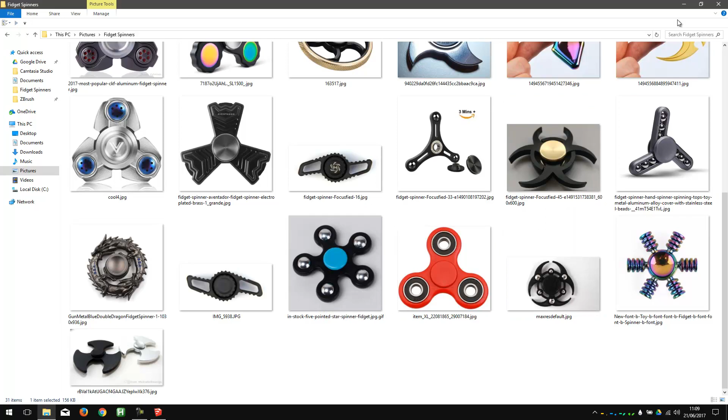So I've actually made the overall shape before just to try it out and see if we could do it. I'll keep that open so we can refer to it, and hopefully we can find a relatively easy way to make that shape. So we'll start out with the central bearing.

11 millimeters, enter, but I don't need to type the millimeters, remember. And I need to make something that goes from here up to 40 millimeters high, so we make sure that we don't make it larger than 40 millimeters. So I start and then I type in 40, enter, and then press escape to finish drawing that line.

And if for some reason you can't see the line that you drew on the axis, you can go view and hide the axes. Okay, now I'm going to draw that size circle, and if I remember correctly, well, I could measure it actually, see what I did last time. It's just about 20 millimeters, so 10 for the radius.

So I want to come down 10 and then draw the circle. So let's see, what's the best way to do that? I could just do this. Type in 10, enter. Then grab that, get my move tool, touch the very top point there, and then touch the top point there.

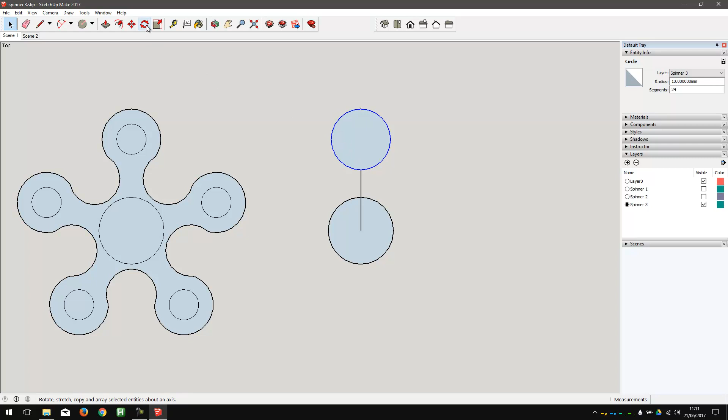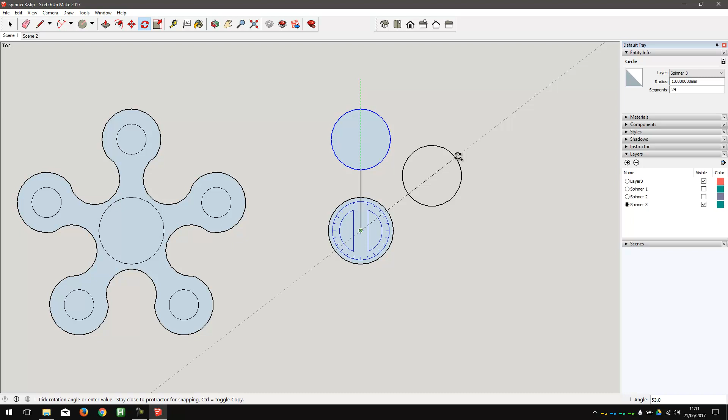I'll get my rotate tool. I'll click on the center of rotation first, make sure it's right there on that endpoint. Then I'm going to click up here. I'm going to start rotating, but press Control first, and that means it'll drag a copy. There's five going around 360 degrees, which means it's 72 degrees. So I type in 72, enter, and then I press X, 4 copies.

And that did that pretty well. Let's move this over just a little bit. And now we need to make these curves going in.

Now, one way I could do that would be to draw a semicircle. So from this point to this point, draw a little line, and then draw a semicircle. So let's try that. And to make sure that we get the correct line, right, because I might accidentally go there, or there, or there. I want to make sure it's exactly these two circles.

So what I really want to do is draw a line from the center of this circle. Alright, and here's a little tip. If you start with the pencil and go straight to the center, it's hard to find the middle. If you touch the circle on the outside, it highlights the center of the circle with a blue dot, and then I can go there and touch that.

So click once. Now I'm going to touch this circle. It highlights the center with a blue dot. Then go touch that blue dot. There we go. And now, because I drew a line from there to there, we know that that point and that point are exactly the correct points to draw this semicircle.

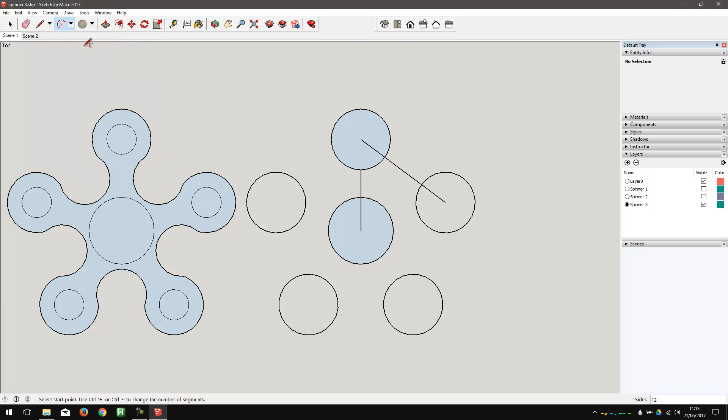And now I'll go over to, not shapes, curves. I'll do a 2-point arc. I'll zoom in a little bit so you can see this better. I'll click there. And then I'll click there. And then I'll come in until it says half circle. Half circle. Click. So that's good.

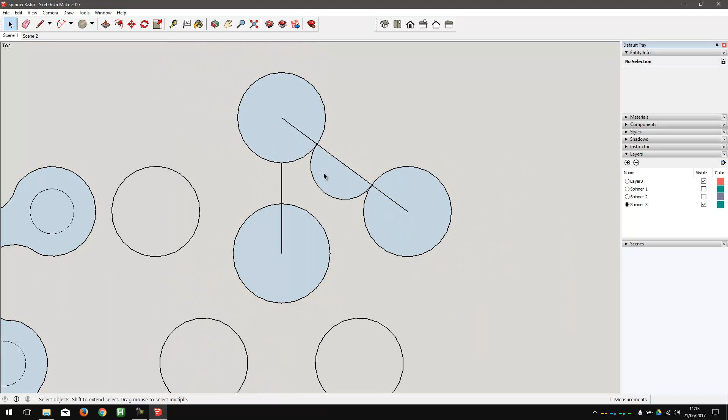At this point I can rub out that line.

And now I want to copy that half circle all the way around. So I'll highlight that half circle, get my rotate tool, click on the center there, make sure I'm on the center. It says endpoint, and I know that this line goes directly to the center of the circle.

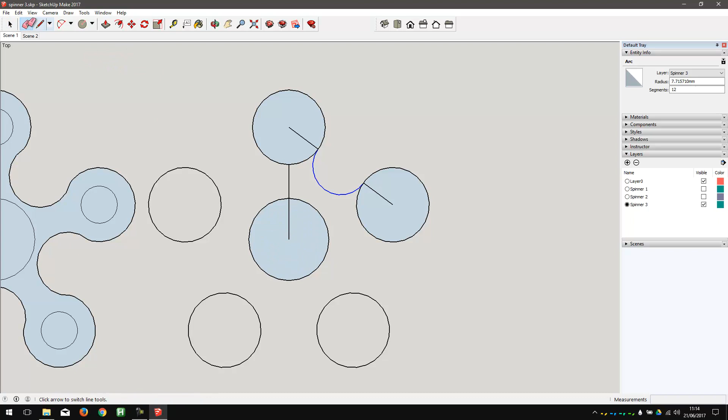Incidentally, if that line wasn't there, maybe you rubbed it out like that, I'll highlight the curve I want to copy, get my rotate tool. And it's hard to find the center, so just touch the circle. Like I said before, when you touch the circle, it highlights the center with a blue dot. Then I can go touch that blue dot, click.

Now, in all honesty, it doesn't matter where I click here. What matters is the number that I type in. But I just like to get into the habit of always pointing maybe north or 12 o'clock. So I click once, start rotating around, and that's odd. Why is it doing that? Well, it's moving that central semicircle, and that makes the objects that it's glued to change.

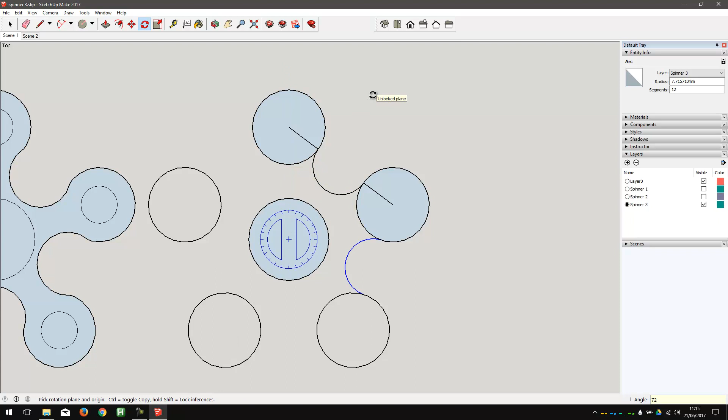So in order to prevent that from happening, I simply need to tap Control. I don't need to hold Control down, just tap it. And now it's grabbing a copy instead. 360 divided by 5 is 72, so I type in 72, enter, and then lowercase x 4, enter. And that did that, so that's good.

I think I want to make a circle for these. Instead of ball bearings, I was going to put sort of marbles in there. So let's just double check the size on those.

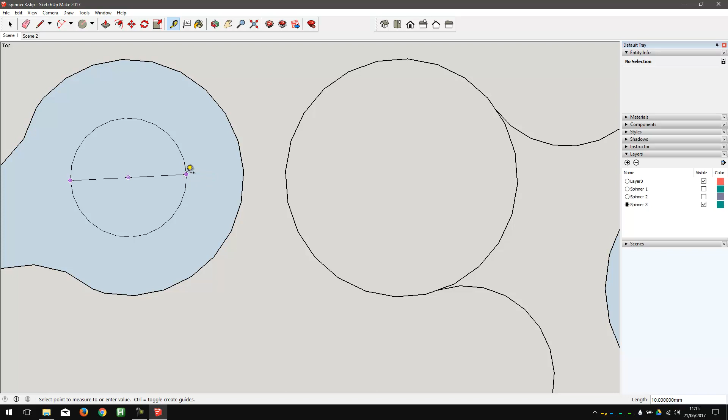If you need to, you can zoom in. Click there. Try to make sure you're going straight across. Like that would be no good. I need to make sure you're going straight across, and it says 10 millimeters. I think that's fairly standard for regular plain old glass marbles.

So I'll draw a circle starting there. Don't go at an angle, go straight up or straight to the right. And then instead of clicking the mouse button for the second point, I simply type in 5 for the radius, enter.

At this stage I can delete some of the things I don't need, like that. I can grab that disk, like that. Actually, no, I probably want to grab the outline, the circle there. Get my rotate tool.

Now I found the center beautifully, but if it didn't, touch the edge of the circle. It highlights the center of the circle blue. Then touch the center of the circle. Click. Okay, go up here, click again. Okay, tap Control on my keyboard. Type in 72 enter, x 4, enter.

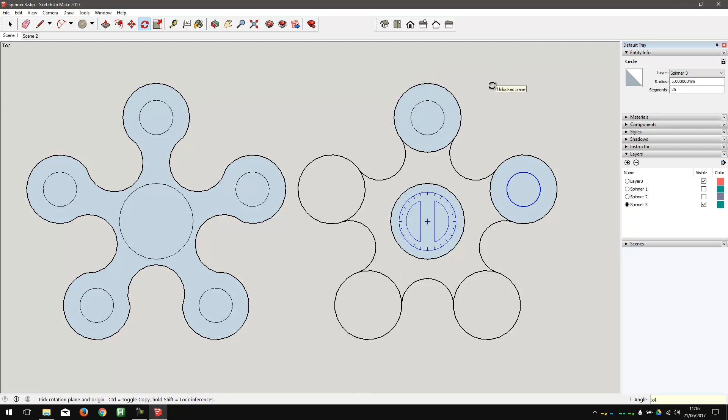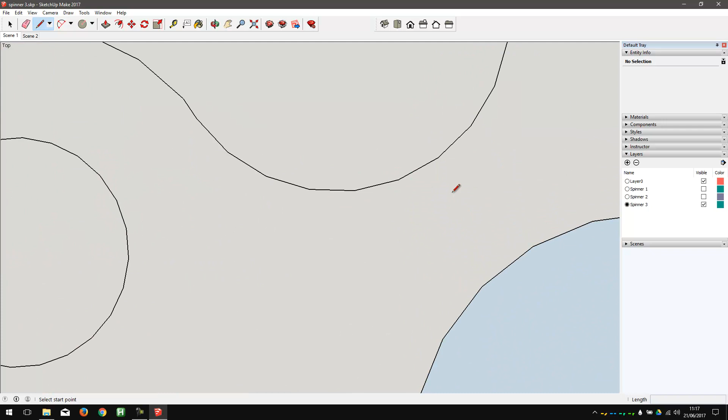And at this stage I can start rubbing out some of these curves that I don't need. And that one. And you can see that there's no fill, so let me just see if I can fix that. Sometimes I've found to fix fills I can just go to any points like that, click once, and then go to a point there and click again. And see how that fixed the fill?

And there's also another problem. If you see a line like this one, for example, that's bolder than this line, it means that for some reason that disk is not selectable, so I can't delete that disk. Well, fix it the exact same way.

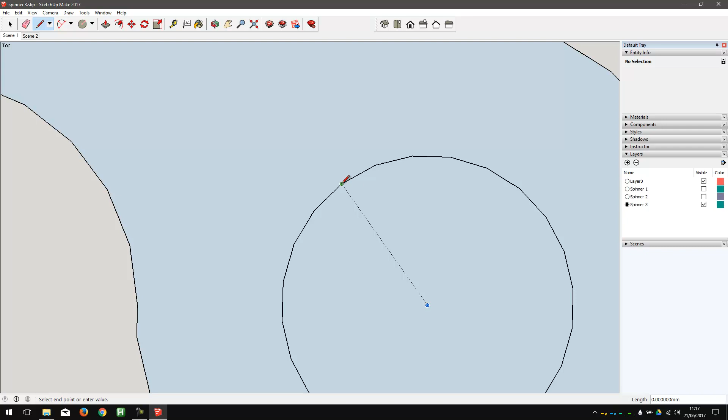Let me just show you the difference. This line is a bit thinner, and you can see I can select that disk and delete it. When I go to try to select that disk to delete it, it selects the whole thing. The way to fix that is just get your pencil tool, zoom in, you can see those segments, just click once there, click there. That fixed it, it went thin. Now you can select that and delete it.

If you try to select something and it selects more than what you thought it should, just get your pencil tool. By the way, green is endpoint, light blue is midpoint. So I want to go to the 2 endpoints like that. Delete that. I can delete that.

That's no good. Get my pencil tool. I tend to zoom in quite a bit just to make sure I'm doing things correctly.

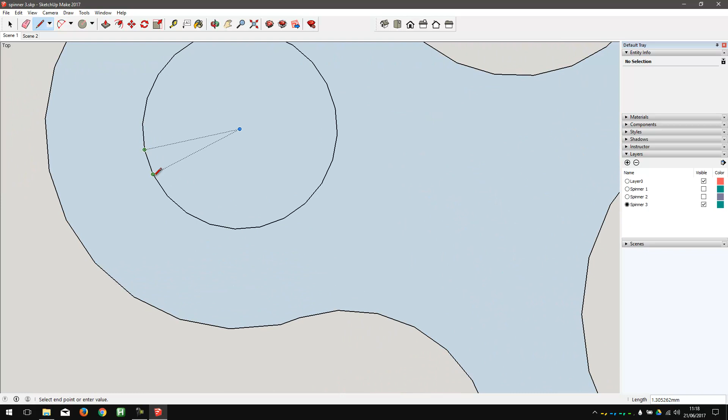Okay, almost done. And now we can go to a 3D view, grab my push-pull tool, tap the surface, push upwards, type in 7, enter. Okay, we don't need this anymore.

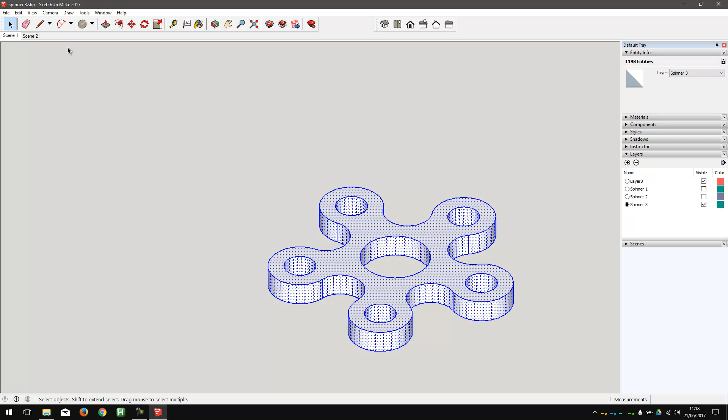Triple click this, 1, 2, 3, edit, make group, and can't remember what color I made the original, so I'll just grab a color here. Materials, let's go for colors, and we'll go for purple.

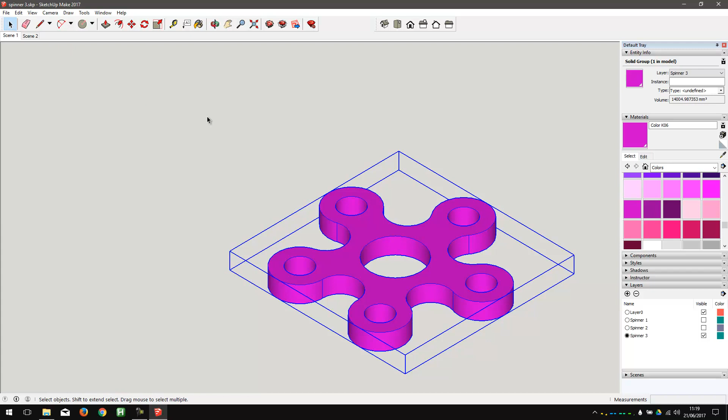And that's it. Okay, just another really quick thing. Let's close materials and look at layers.

Okay, so let's make spinner 2 visible. There it is. Let's make spinner 2 the highlighted layer and hide spinner 3.

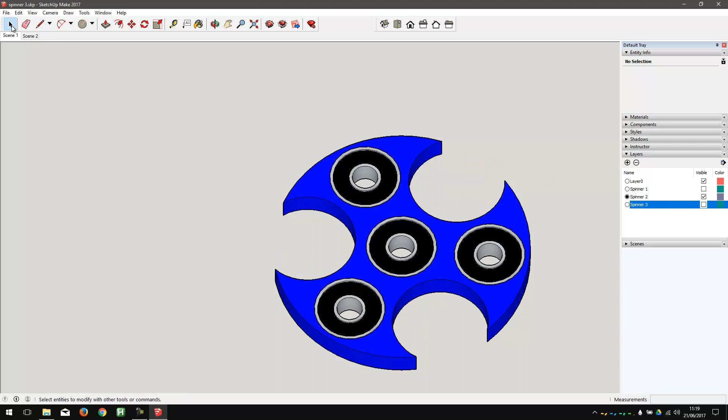Now let's copy one of those components. Well, they're all grouped up. Actually, I don't need to copy them. What I could do, because I made the original ball bearing as a component, I can make spinner 3 active again, hide spinner 2, and with spinner 3 active, I'm going to go up to the tray here that says

Components, and remember, if you don't see that tray, go up to Window, Default Tray, and turn on Components. Then I'm going to click on the little down arrow right there and say I want to see some components that are in the model.

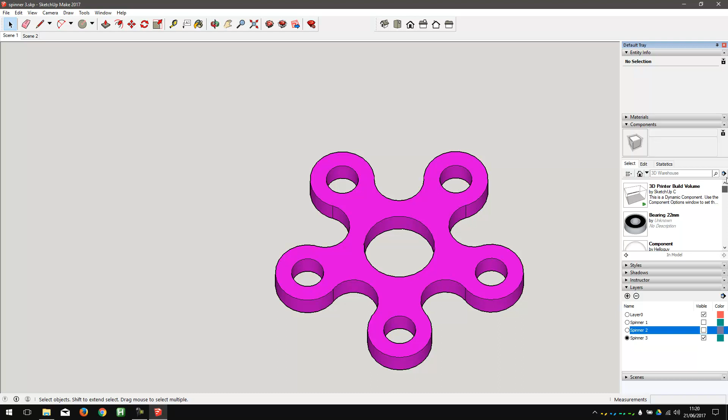And here are the components that are in the model, and the only one I need is the bearing, so I single click that, and I'm just going to drop it right there for now, and then I'm going to hide that because I don't need that anymore.

Now I'll go to a top view, and I want to center this one perfectly right there. So here's my trick: I just grab the pencil tool

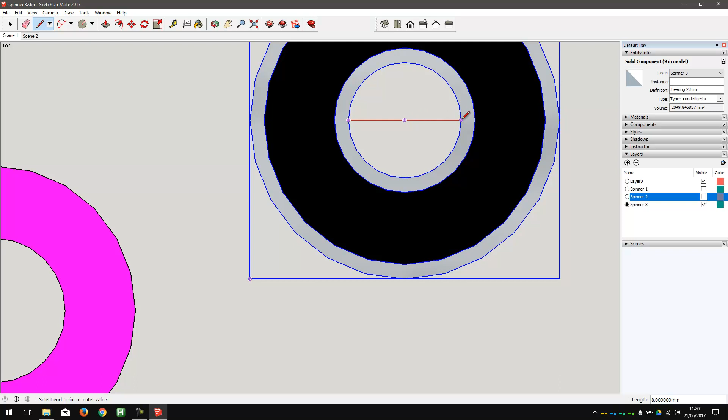And I find the midpoint. So I just touch the circle there and go to the midpoint, or more often than not I'll go straight across like so, and then I'll press escape.

And I'll do the same thing here, but maybe from top to bottom, like that. Press escape to finish the line.

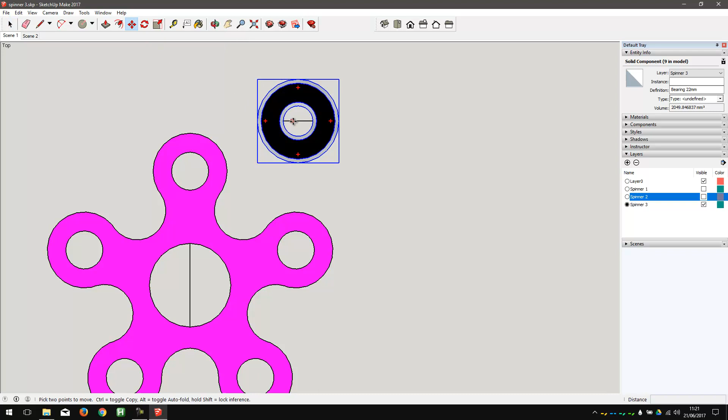And then what I'll do is I will simply touch only the bearing, like so. So select the bearing, get my move tool, like so, and then I will touch the center or midpoint of that line. Okay, and it just snaps right to the middle there.

And then I will touch the midpoint of that vertical line, and then I can actually rub the two lines out because I don't need them anymore.

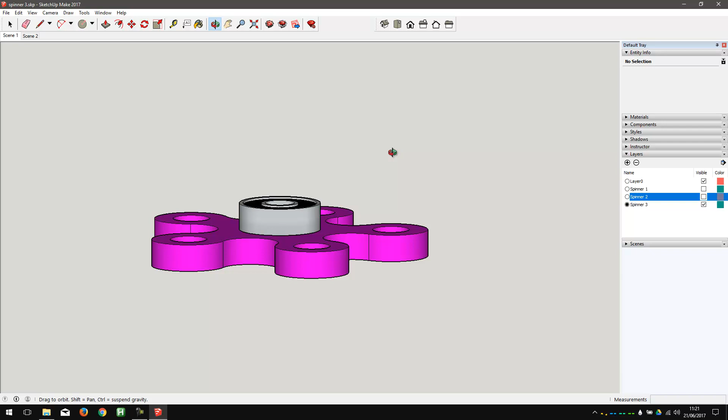Just go to a 3D view to make sure it looks good, and if for some reason this was not lined up, so for example maybe it was up resting on the surface like so, because that happens sometimes by accident, all you would need to do is go to a front view, make sure perspective isn't on, because if it is, it would look like this, and it would be really hard.

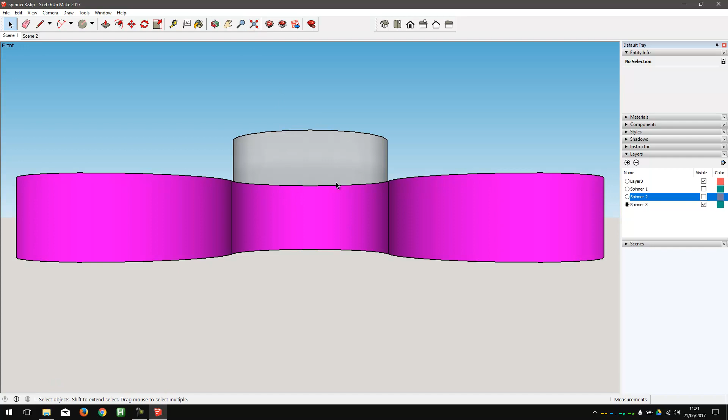If I went to a front view—oops, I don't know what that's doing there, let's get rid of that. If you went to a front view and it didn't look head on, it's because you've got perspective on. So let's turn perspective off.

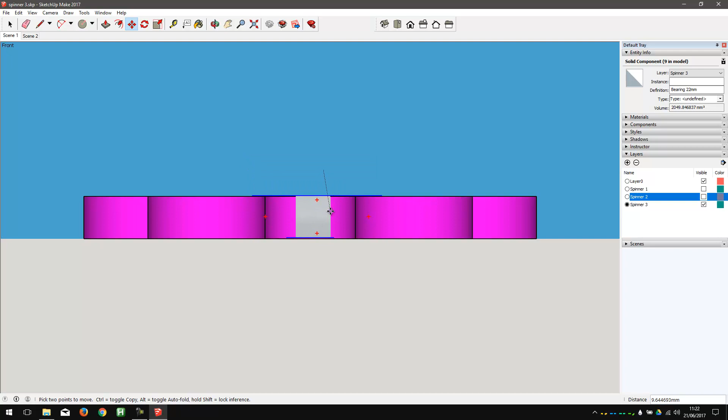Select the ball bearing, get the move tool. Do not touch the bearing, okay, because that means that when you touch it, whatever you touch next, it'll snap to it. Right, and I'll show you what would happen. If I touch that and go there, you'll see that it moved it.

It's no longer centered. So let's undo that. Go back to a front view. When you select something with the pre-select method, you can see the blue outline.

Then when you get the move tool, you can click anywhere out here once, then let go of the mouse button, push down so it's going straight down, not at an angle. And then do not click the button a second time. In other words, don't do this by eye.

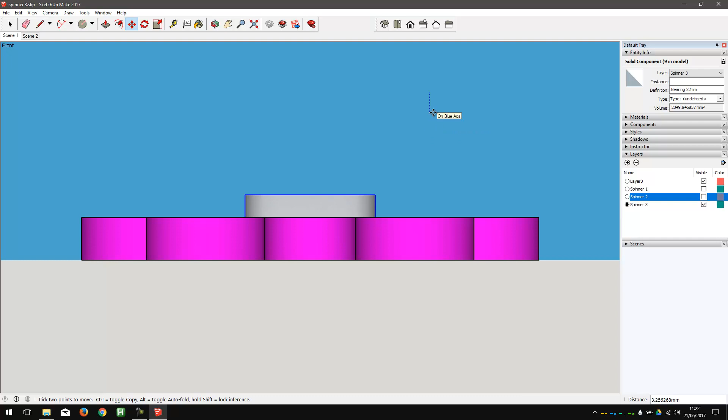What you should do is type the value in, and we know that the thickness was 7 millimeters, so we'll just type in 7, enter. And you can see that did the job.

Okay, now I can highlight the whole thing and say Edit, Make Group. Okay, and yeah, in a later lesson I'll probably show you how to design and draw spheres, which is a bit complicated, but we won't worry about that for this one. Okay, that's that one done.